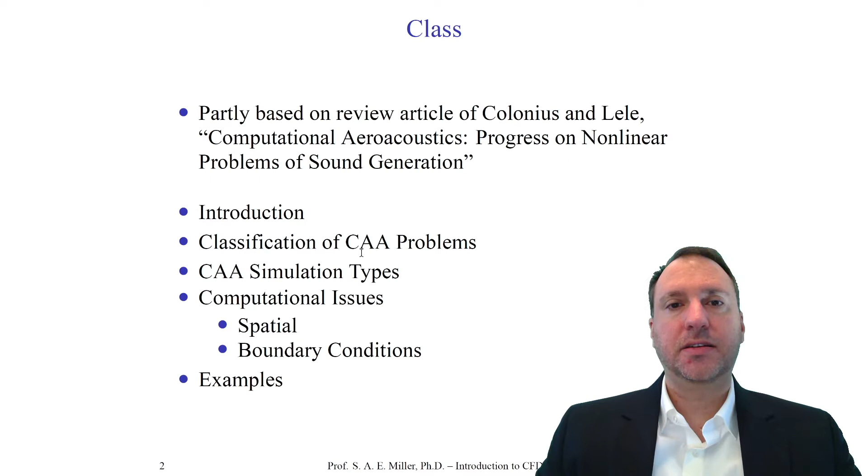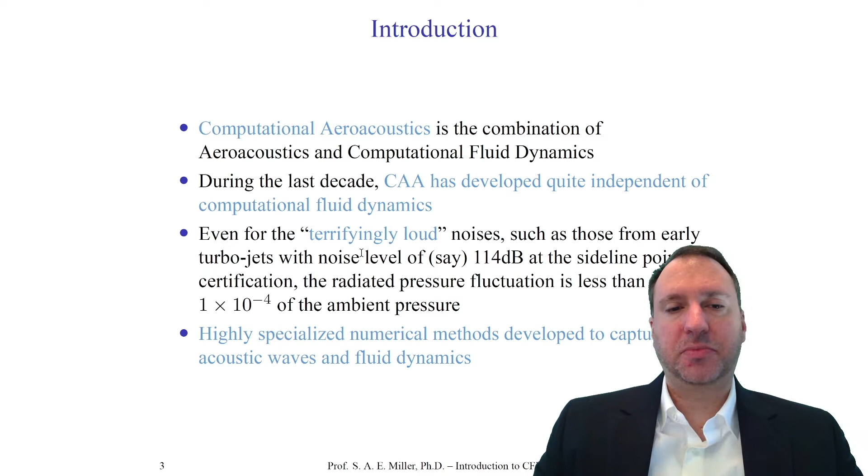Now, computational aeroacoustics, that is, performing aeroacoustics problems numerically, will be the combination of using aeroacoustics and CFD. Its development is really quite independent of computational fluid dynamics, but nonetheless, the two fields have really merged. Highly specialized numerical methods were developed to capture both the acoustic waves and fluid dynamics.

These instabilities were seen in general by people watching concerts with their flames dancing to the notes. A fellow named Tyndall conducted experiments and noted that smooth flames of, say, 24 inches reduced to only 7 inches when particular keys were shaken on the keyboard. Nonetheless, it's shown today that the transient irregularities on these surfaces of smooth jets is created by the noise. It's one of many examples of flow instability altered by acoustic waves, which is part of the field of aeroacoustics.

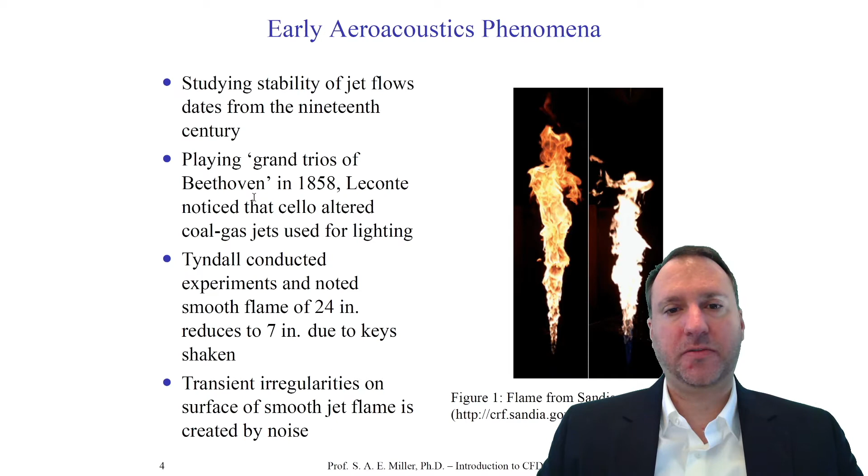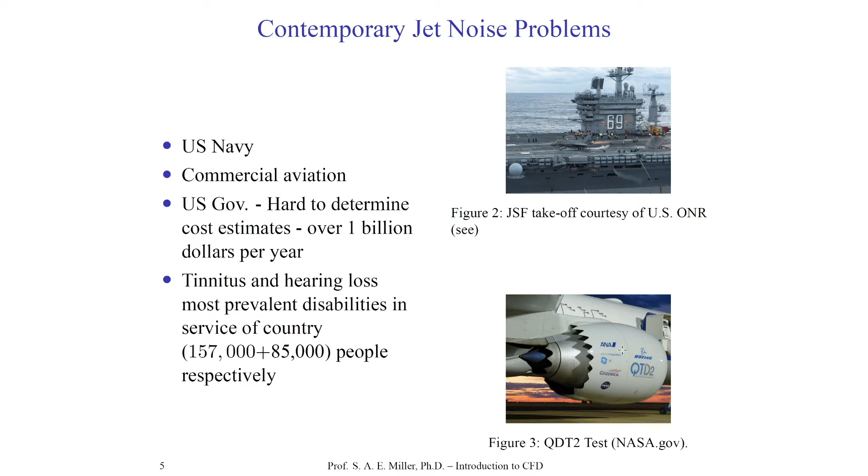Aeroacoustics today is very important because of, for instance, jet noise. Jet noise might be separated into two categories, military and commercial. On the top, you see a United States Navy carrier with an aircraft on the deck, and there's a large plume containing shocks and supersonic turbulence in the exhaust. There's many personnel staying right next to them. Nonetheless, today, Navy personnel lose their hearing or some have permanent hearing damage within about 10 to 15 minutes of being on the deck in these full operations. They also have tinnitus and other hearing effects and psychological effects from noise. In the lower right, you see a contemporary aircraft engine with teeth or chevrons on the nozzle, and these chevrons are designed to reduce noise on commercial aircraft, around airport or airportal communities. So this is another example of where aeroacoustics has directly altered aerospace engineering and aeronautics.

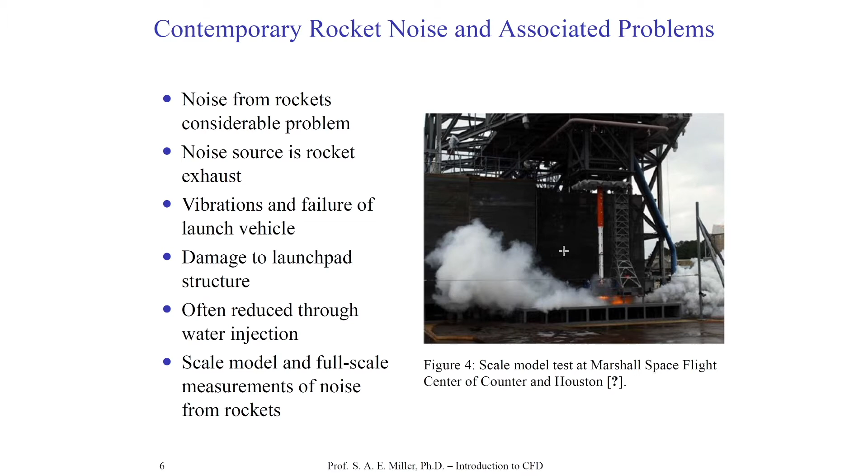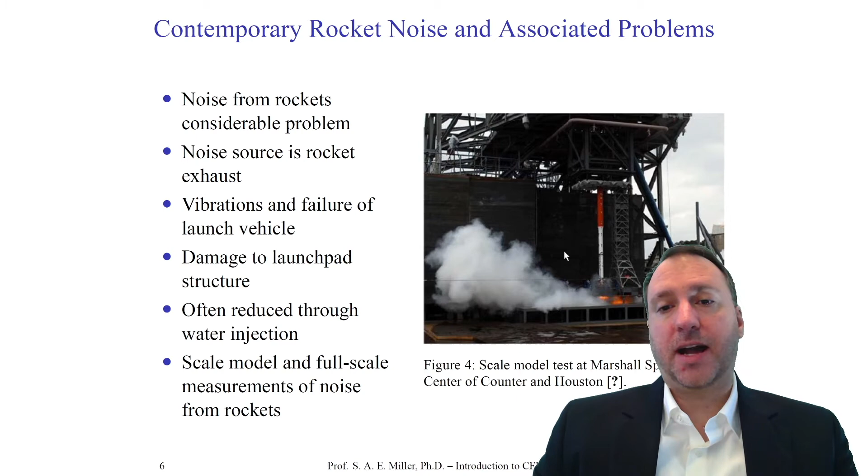Aeroacoustics also exists in the aerospace industry itself, the space side of it. Here on the right, you see a particular rocket from Marshall Space Flight Center. This is actually a scale model test. The noise around the launch pad structure is so loud that it damages the launch pad structure and might even damage the rocket itself and lead to flight vehicle failure. Acoustics around launch pad structures has also altered and destroyed satellite systems, so when they reached orbit, unfortunately, they couldn't be activated and work. That's another huge problem with the aeroacoustics problem.

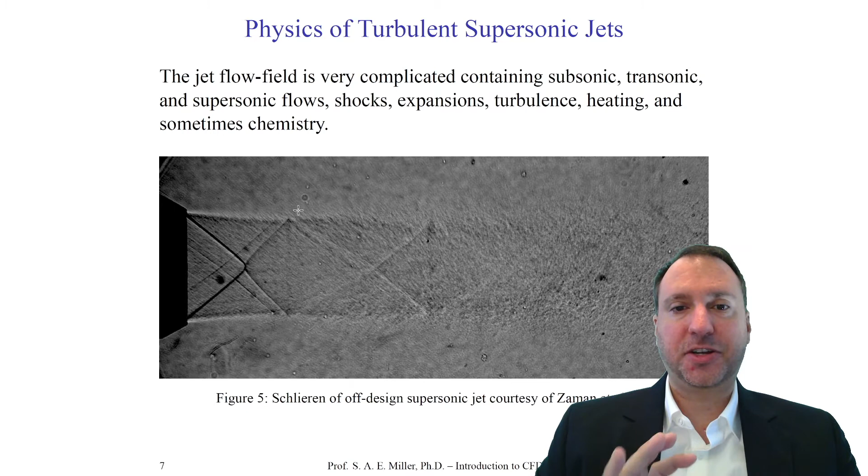It generates very complicated acoustic radiation. So you have to completely understand the fluid dynamics and mathematics of the jet problem before you can study the acoustics problem associated with jets, to solve the problems in the aeronautics and space industry.

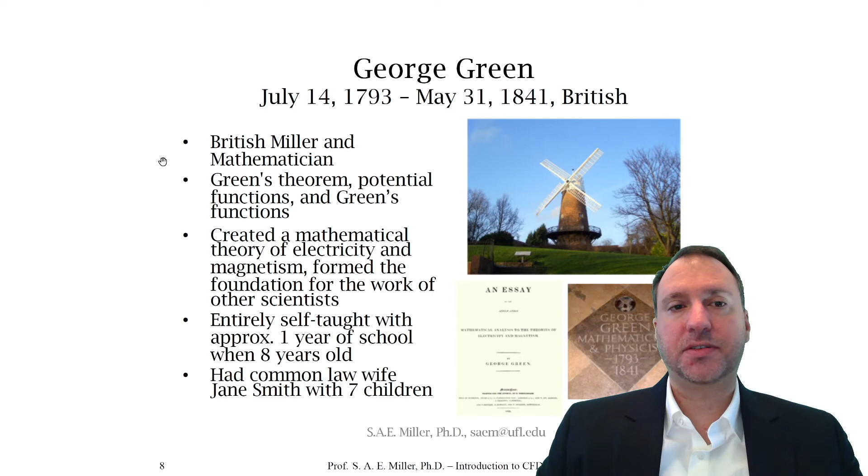A lot of the aeroacoustics work was actually traced back, not directly, but with particular solutions of what we call acoustic analogies, to a fellow named George Green. George Green was basically a teenager when he became interested in mathematics, and he was self-taught. He found many mathematical theories that we still use today, including Green's theorem, potential functions, and of course, for aeroacoustics, the famous Green function.

Another important person in the heritage and development of aeroacoustics was Geoffrey Lilley, who was my advisor's advisor, and he was the one who originally came up with the ideas of chevrons and teeth. He actually did it for an open jet wind tunnel, but you might see some military or commercial aircraft with these types of structures on the rear end, the lip of the nozzle, and these are there strictly to reduce noise without hurting thrust.

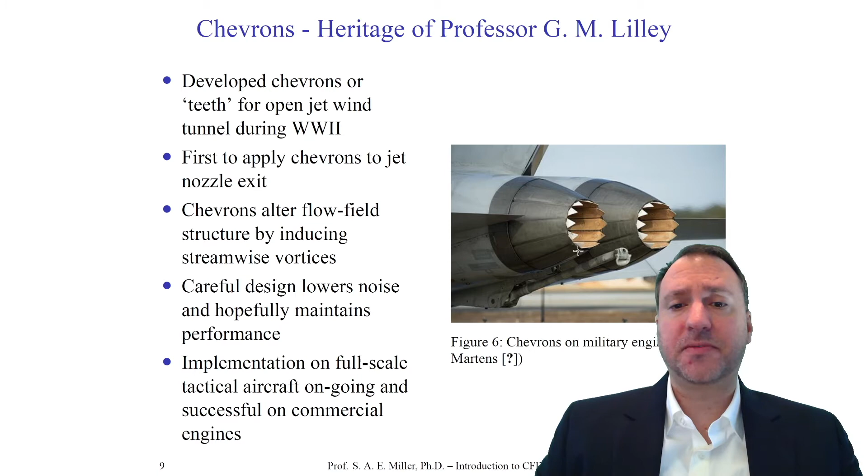It's a very difficult problem that's under current research today and has been a big part of my career. Now, traditionally, the challenge of aeroacoustics can be traced to the fact that the acoustic waves are an unsteady fluid dynamic process in their generation.

Turbulence modeling such as RANS or unsteady RANS and LES often filter out the scales that lead to acoustic radiation. So the fine scale turbulence would be averaged away with RANS or filtered away with LES. These typical approaches cannot typically be used directly for aeroacoustics problems without some modification.

We do note that these acoustic waves propagate directly and coherently with very low attenuation and viscous effects over long distances. Therefore, like the artificial dissipations in your typical commercial solvers, may be inappropriate to handle aeroacoustic problems.

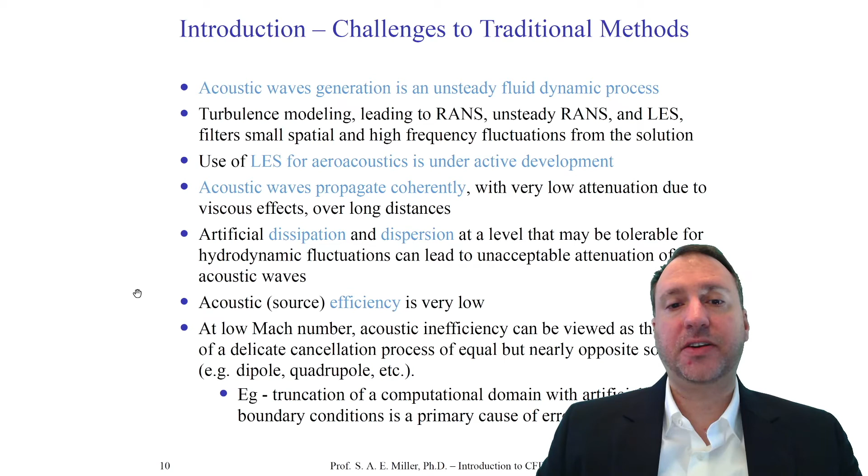We also note that acoustics is a very low efficiency mechanism of generation. For example, when a 747 takes off under full power, with 4 engines, most of the energy from the engines will be dissipated in heat. The amount of acoustic radiation in terms of total energy from a 747 on takeoff is only enough to boil a single hard-boiled egg. It's very little energy, so the acoustic radiation is very inefficient relative to the conversion of the fluid dynamic energy into heat.

If we look at computational aeroacoustics itself, we might view it as a separation of linear to nonlinear problems. There are many nonlinear acoustic problems. When the acoustic intensity from, say, a fluid dynamic flow becomes large enough, it'll start to propagate in a nonlinear fashion. This is a major problem and causes breakdowns in many techniques.

Thankfully, some problems can be examined as a linear acoustics problem, where we can separate and look at the solution as a separate linear acoustic solution that's coupled with the fluid dynamic solution. This is often done today, and it's advanced the field a lot. But unfortunately, there's some sources like a sonic boom problem or a very large jet flow, which will not allow us to linearize problems.

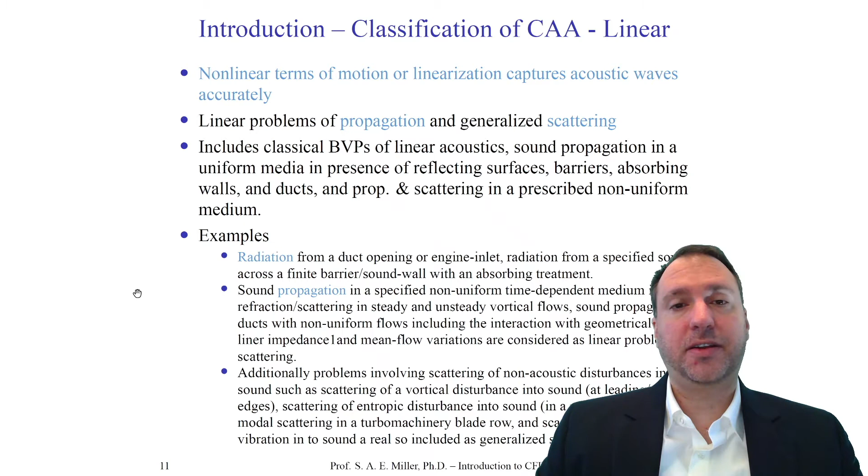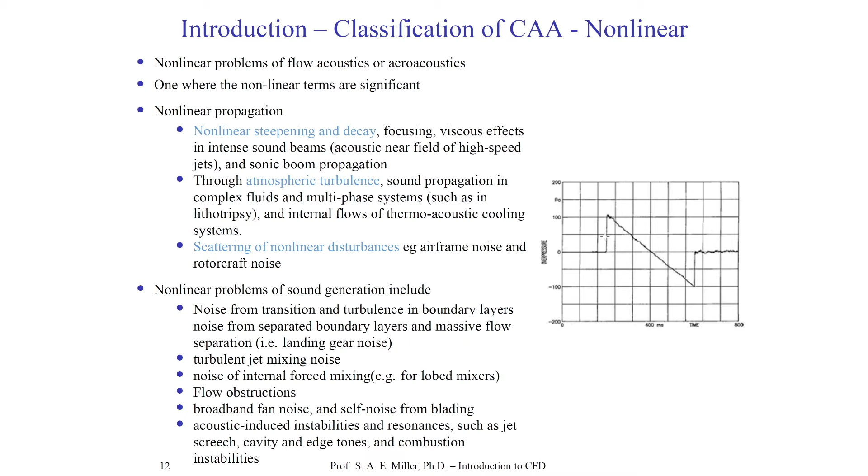The nonlinear problem is even more complicated. On the right, I have a typical N wave, a very simple sine wave of acoustics. If it's high enough amplitude, or if it travels far enough distance without being dissipated, it will eventually coalesce and become this N-type wave. This is its own type of shock, and many people are not aware that a simple sine wave or acoustic wave can actually become a shock. That's very counterintuitive, but of course there's mathematical equations and proofs to show this is true, and we see this in nature and in engineering.

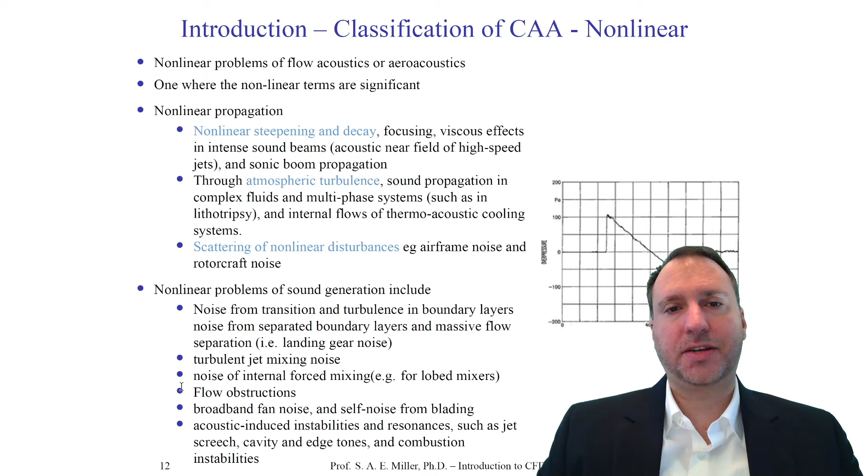There's all kinds of areas that must be accounted for, which I've written on the left for these types of problems. You have to understand atmospheric turbulence, the nonlinear steepening of disturbances, the decaying of these waves, and of course all the nonlinear mechanisms themselves which might generate more noise if these waves are interacting with other turbulent fields or other solid structures.

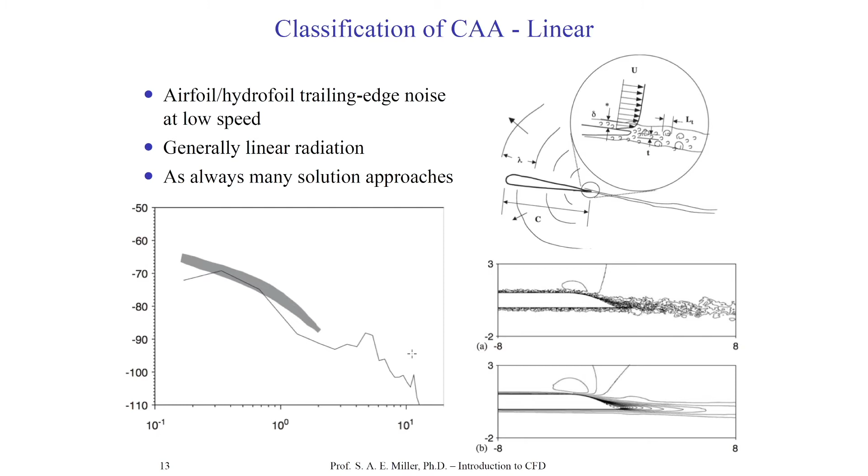On the left, we can see one type of spectrum. On the x-axis is frequency, and the y-axis is something like the power spectral density in a log plot. You can see it creates something like a spectrum of noise - this is the intensity, essentially, of the noise as a function of frequency. These types of noise sources, especially if they're from turbulence, create broadband, high-intensity turbulent noise. This is also a major problem for the aerospace industry and should be mitigated. This is a quieter problem, but there are many more louder problems.

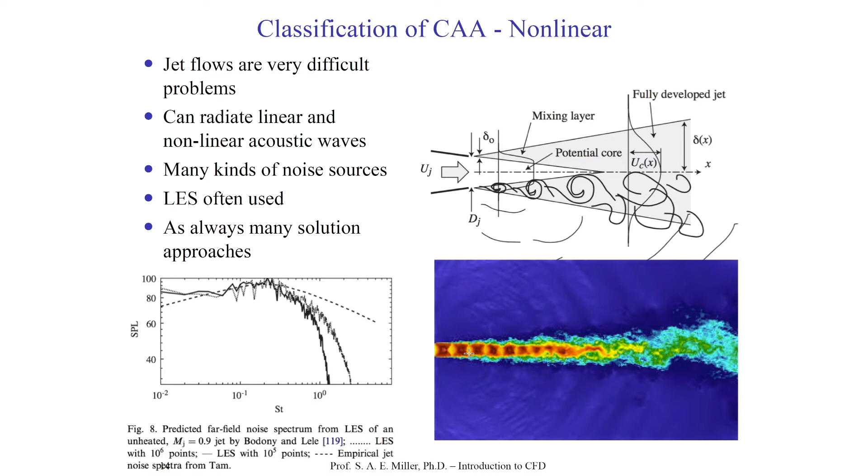This, of course, can be predicted with CFD or performed with experiments. The upper right figure shows an outline, or caricature if you will, of the processes in the turbulent jet in the lower right. In the lower left, we have a sound pressure level, which is like the amount of energy, pressure squared per unit hertz, normalized with a logarithmic scale, in sound pressure level based on dB, with non-dimensional frequency on the x-axis. These lines represent two particular large eddy simulations from the result on the right, with one particular empirical formula as the dashed line. So you can see we can combine LES with acoustic theory to predict the acoustic noise. This is a rather complicated approach, and it's a whole field in itself - many of my students have studied this particular interesting problem.

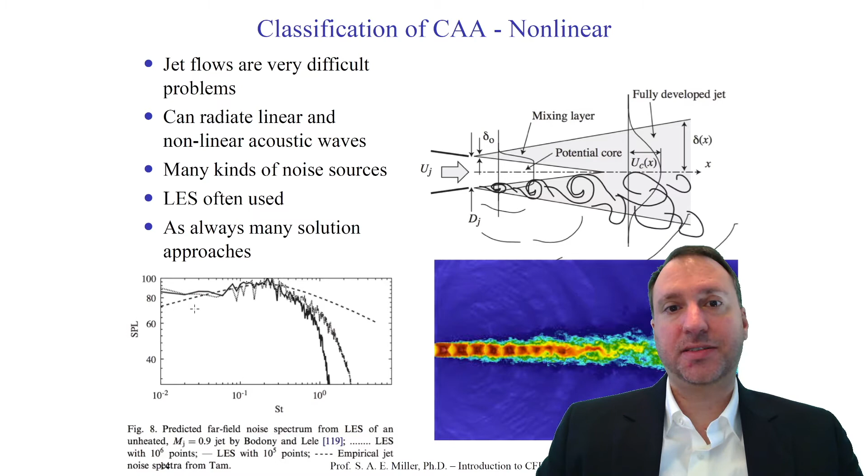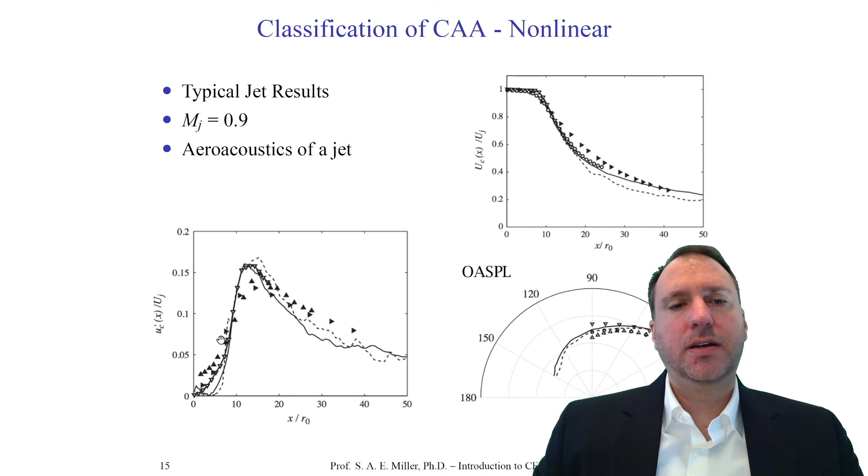In the lower left, we show the turbulence intensity, U prime along the core divided by the jet velocity - fully expanded velocity - divided by, of course, the distance from the nozzle exit. We show, once again, LES predictions and experiments. In the lower right, we can use this data to create predictions themselves.

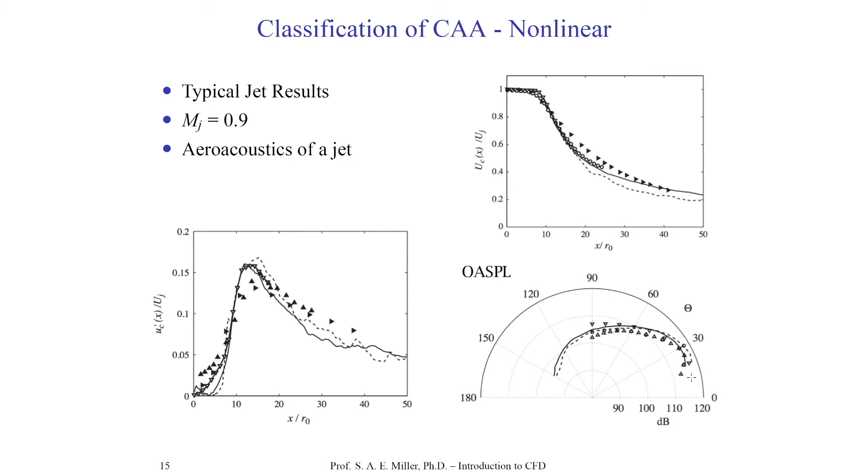This is a polar plot, which we talked about earlier in this class. The 0 degree is the downstream direction. As you go up to 180 degrees, that would be the forward direction relative to an aircraft - the aircraft might sit in the middle. This line and points represent the same predictions, and so there's some directivity with noise. Many noise sources contain some particular type of directivity.

Outside of computational fluid dynamics, and something which eventually has been combined with computational fluid dynamics, is the all-famous acoustic analogy. The acoustic analogy is a particular solution, a statistical solution for a very specific quantity and type of flow field of the Navier-Stokes equations. The Navier-Stokes equations are rearranged without assumption into a left-hand side wave propagating operator, and right-hand side source terms, or equivalent sources. Many famous forms of this equation exist today, but it was indeed pioneered by Lighthill in the 1950s, who's, of course, a very famous mathematician.

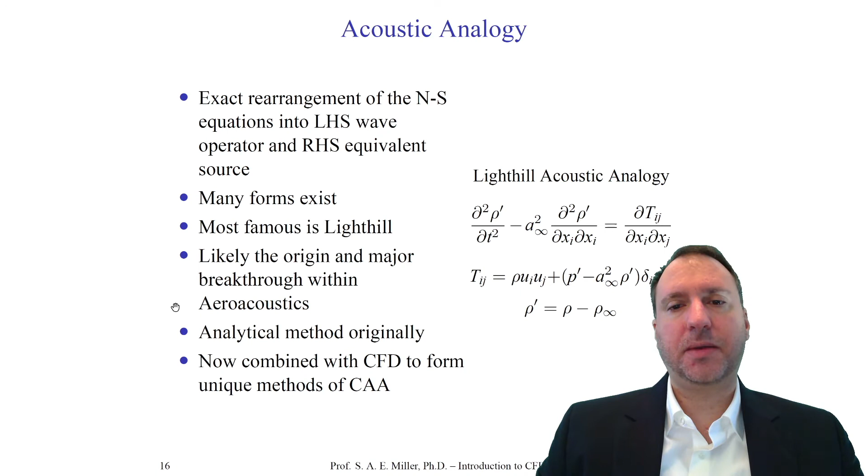These are a type of original analytical methods in acoustics and might be viewed as the birth of aeroacoustics. Lighthill's acoustic analogy is shown on the right.

This is the particular wave equation in 3 dimensions, and the right-hand side represents the double divergence of the stress tensor, which we call the Lighthill stress tensor, written here. All these variables should be familiar to you after our fluid dynamics review session, so you can see this is a very simple and technical form of the equation.

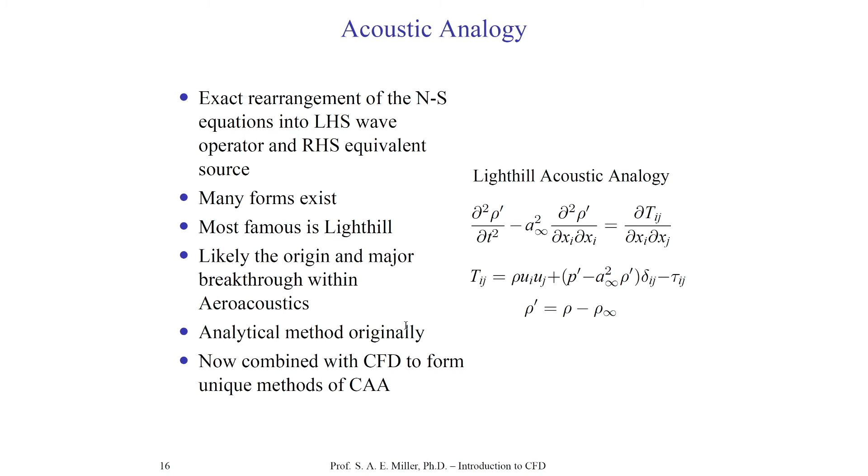We can also solve this numerically and combine it with computational fluid dynamics to form a unique field called computational aeroacoustics. Now, there are different classifications of aeroacoustics.

We can go back and do direct numerical simulation or large eddy simulation, and these would result in, if we're putting and measuring a pressure outside the turbulent field, the acoustic fluctuating pressures, which we calculate directly. This is very computationally intensive and expensive, so it's not typically done today except for research studies.

There's also hybrid methods which are much more popular. We might combine DNS and LES with acoustic analogies, which is becoming very popular. Simpler methods like vortex CFD methods can also be combined with the acoustic analogies.

We might try and split our flow field into an incompressible part and a compressible part and solve the problem in that methodology. We might linearize our equations to study the linear waves coming out of a mean flow, like the linearized Euler equation approach, where we linearize the equations and solve the linearized form about a base flow. And we might use an LES method.

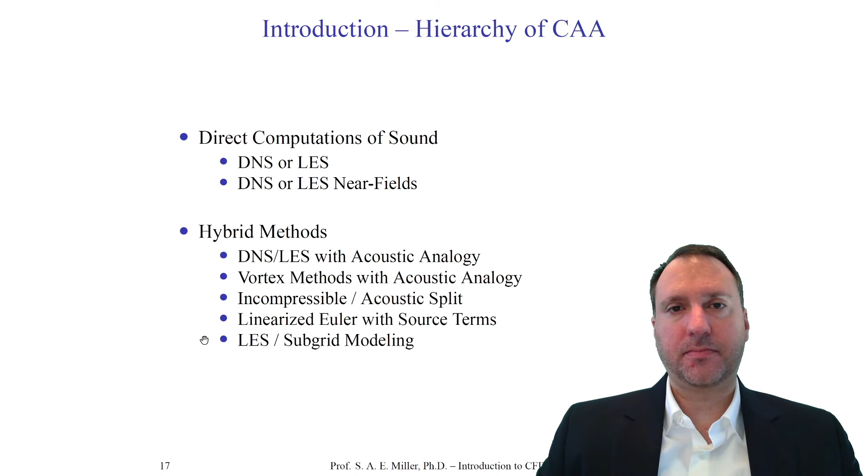Now, numerical discretization in computational aeroacoustics is very important. There has to be the effect of preserving the dispersion properties of waves.

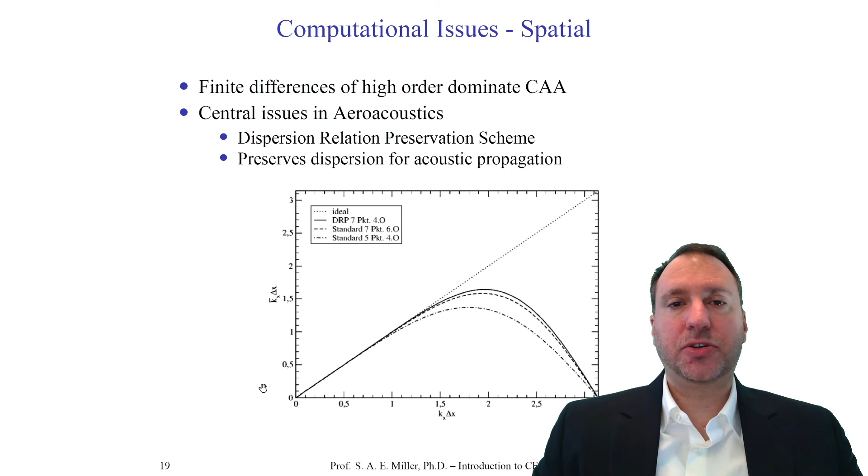On this particular plot, I've shown the famous dispersion relation preservation numerical scheme, which is a finite difference scheme, of course, from Professor Chris Tam of Florida State University.

In this particular plot, it's very important to note that there's a particular wave number and its dispersion property which are being preserved. Ideally, this would be a relation which is linear and conserved.

Of course, if we apply standard 5-point or 7-point central differences, we would only find a particular relationship that goes where my cursor is moving. With dispersion relation preservation numerical schemes, we've optimized the coefficients to preserve this relationship.

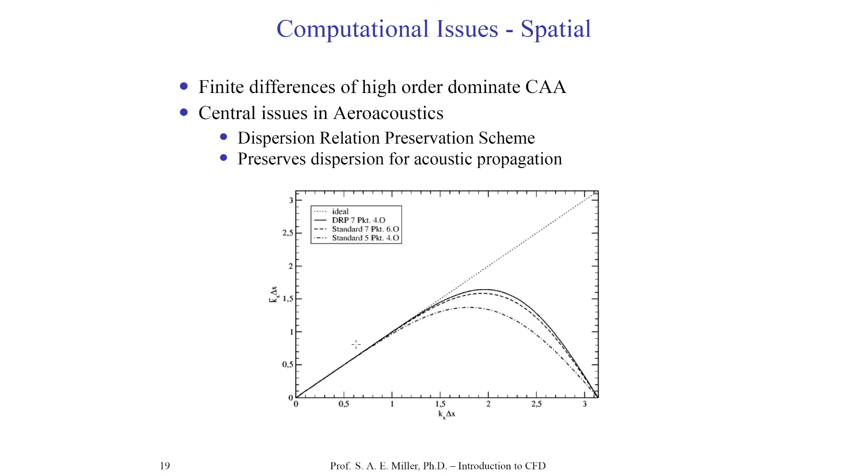In aeroacoustics, if we're just doing the work computationally, we would use a DRP scheme to try and preserve the dispersion relation of acoustics. This is never done in a conventional CFD solver, and is one of the core reasons why conventional CFD is not appropriate for acoustics problems.

Aeroacoustics also requires very specialized specifications of boundary conditions. The boundary conditions for typical CFD, which we talked about in this class, are not necessarily appropriate for an acoustics-based CFD problem. If we're doing full Navier-Stokes equations and want to capture the acoustics in the CFD, we have to have specialized boundary conditions.

The boundary conditions, in addition to their normal properties, must also handle all the effects of the acoustic waves entering and leaving the domain. They should be specified or allowed to leave without reflection. This is a very difficult topic which many people have spent their careers on, the boundary conditions for acoustics and electromagnetics.

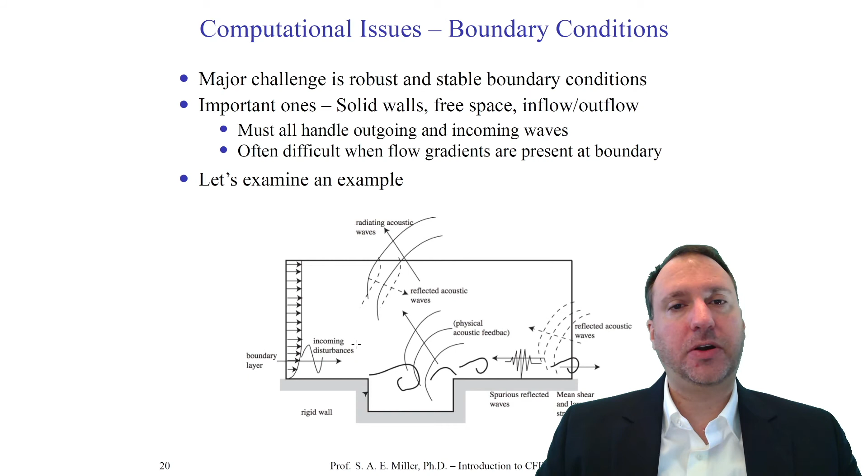In the lower part of the page, I've shown one particular figure of a cavity flow problem, which of course we talked about in this class. But have you considered how the acoustic waves are generated in the flow and how they leave and enter the domain? This type of figure here, which I'll let you review quickly, shows these types of effects.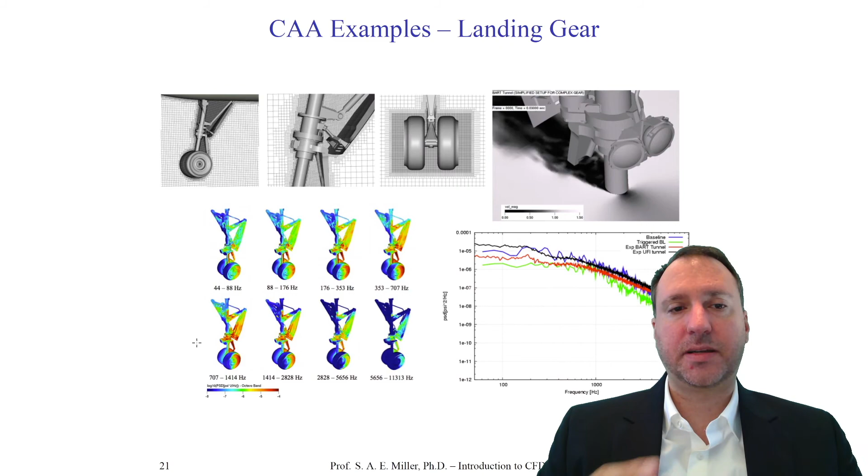You can see a lot of the noise at certain frequencies comes off different parts of the landing gear, for example the tires, the struts, the pipes, the tubes. The noise can be predicted from this case in the lower right, where on the x-axis we have frequency, and on the y-axis we have some intensity of the sound. Here's different experiments and the predictions from the CFD. Take a second to look at this example.

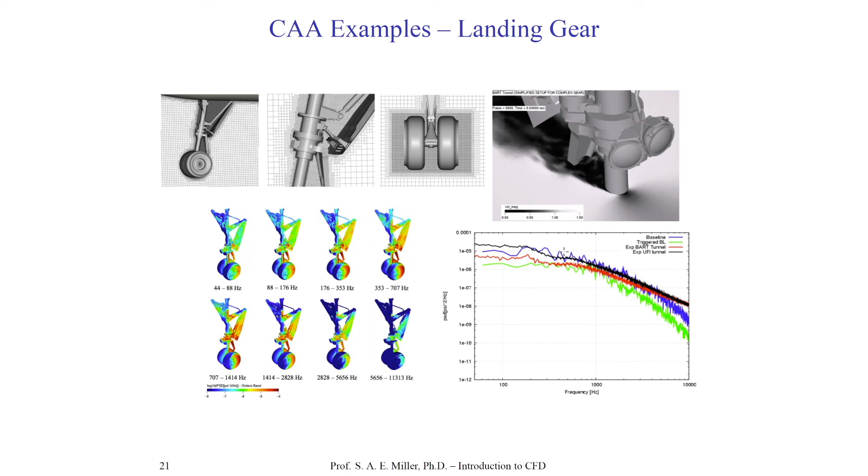Another famous example is the cavity flow, which I just discussed the problem in boundary conditions. Here the flow moves from left to right, and there's a turbulent, complicated field that forms inside the cavity. The flow moves uniformly into the domain, and it sheds, and acoustic radiation is generated by the cavity.

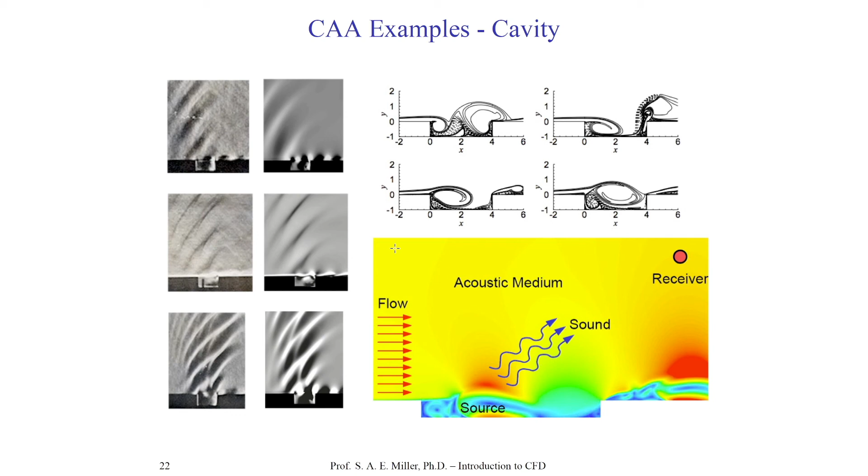This acoustic radiation can be visualized in these basically what we view as numerical schlierens on the left side of the figure. You can see acoustic waves for this particular case are very directional and actually travel in the sideline direction, that is the upstream direction of the flow, which is very counterintuitive for very high-speed flows. This is another famous acoustics problem for cavity flow, studied today especially in the commercial sector for aeronautics.

Another famous acoustics problem is the slat problem. Here we have an experimental figure where the flow comes from left to right over an open slat on an aircraft wing. These are the parts of the wing that fold forward to create additional lift.

Here you can see we show a numerical schlieren, essentially contours of acoustic pressure, of the radiation from the trailing edge of the slat. Today we might develop something called a slat cove filler to fill this in. As the slat opens, it would fill in this whole area.

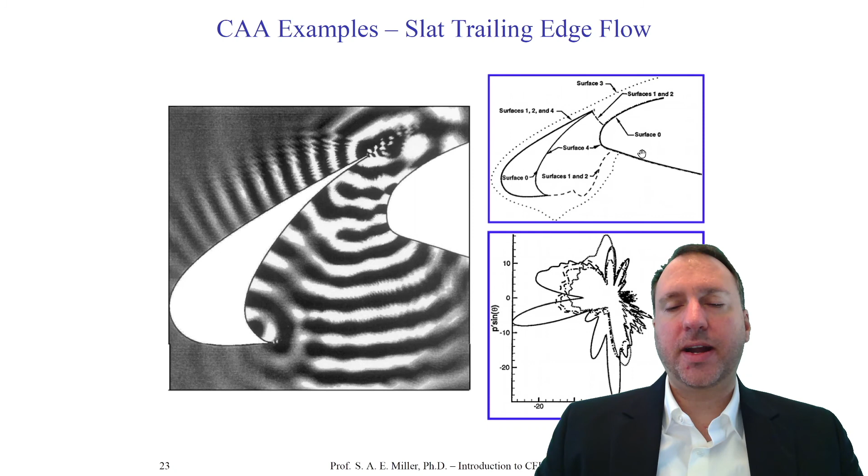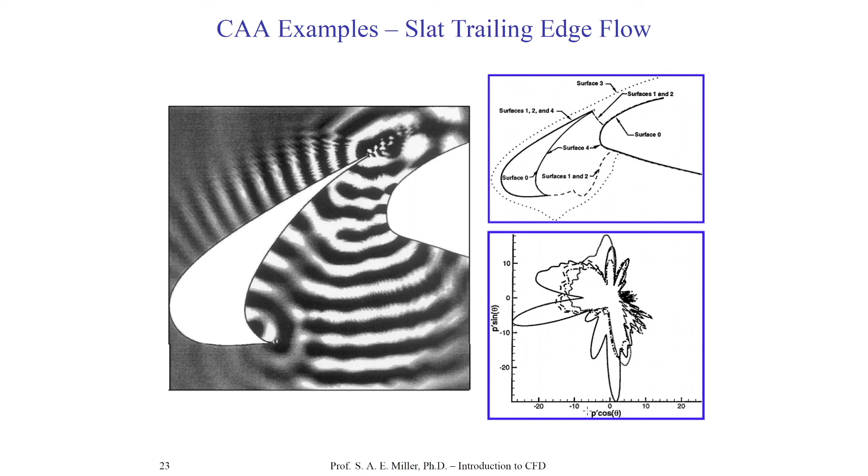In the upper right, there are some diagrams of the fluid dynamic effects, and on the lower right, there's a directivity plot, much like the polar plot I explained earlier, of the directivity of the acoustic radiation. This is another challenging research problem which many students like to work on.

Let's summarize our major points. This is just the tip of the iceberg of the entire field of aeroacoustics, and the specific subfield of computational aeroacoustics, which is a subfield of CFD.

The field of aeroacoustics and acoustics is very old, and certainly much older than the field of CFD. Today they've merged, and some people who practice CFD are highly specialized in the field of acoustics. They've combined these two things into their own specialty. This was my original focus when I was an undergrad student.

I looked at, in a research group, computational aeroacoustics, and it led to many of my other interests. I hope that through one of these specialized courses you can find one of your interests, or maybe one I'm not talking about, to focus on in the future. This way you can become a very powerful and insightful researcher, with a very deep knowledge of two particular subjects which you've combined in a new way to find out something amazing and beautiful.

Now, CAA, or CFD in acoustics, requires very specialized methods, and this field is just as big, if not bigger, than CFD itself. It also requires specialized boundary conditions. Our governing equations are not truly altered—we're still looking at the same Navier-Stokes equations, but in a different way. The analytical methods that have come out of acoustics and aeroacoustics are now often combined with CFD simulations, creating new and unique semi-analytical or semi-empirical approaches.

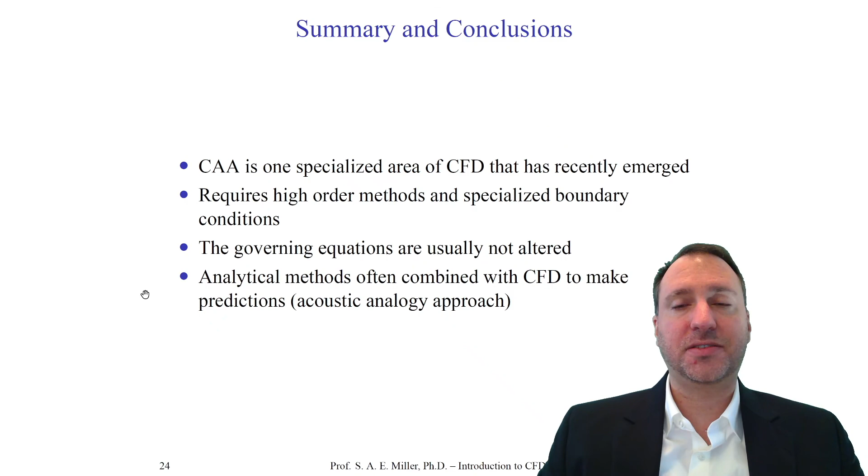If you want to talk more about acoustics or CFD, contact me—I'm happy to talk about these subjects with anybody. This is just a very short presentation to give you an idea of the field. Thank you very much for your time today. I'm Professor Steve Miller.